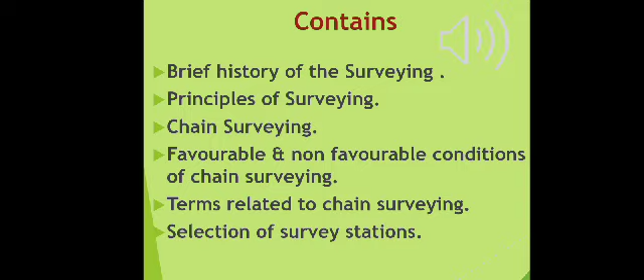Today, I will discuss the brief history of surveying, principles of surveying, chain surveying, favorable and non-favorable conditions of surveying, different terms used in chain surveying, and also selection of survey stations.

In this slide, I will discuss the brief history of surveying. Surveying was first started in Egypt about 1400 BC, when land divisions were washed away by annual floods of the Nile. This was for taxation purposes. Rope stretchers, the Egyptian surveyors, made this survey with simple instruments like rope having knots at unit distances.

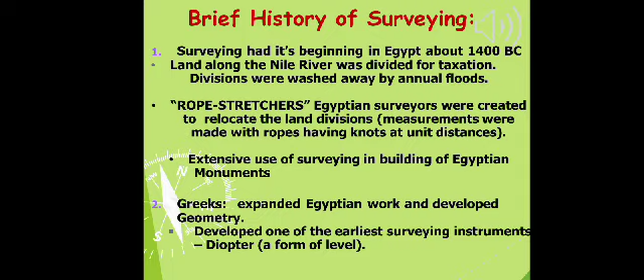The Greeks expanded the Egyptian work and developed geometry and the diopter, an early instrument for surveying. The Romans used surveying in more scientific ways and developed Roman roads, aqueducts, and land division systems. Groma, libella, and chorobates were developed by the Romans.

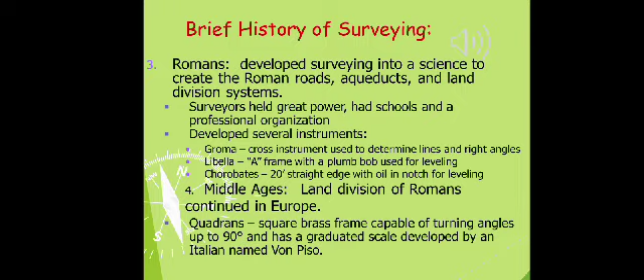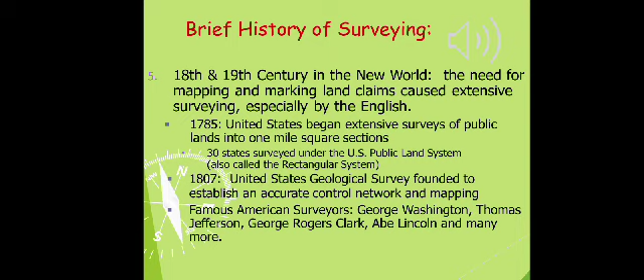In the 18th and 19th centuries, the English needed mapping. In 1785, the United States began an extensive survey of public lands into 1 mile square sections. In 1807, the USA Geological Survey was founded to establish an accurate control network and mapping.

Licensure for surveyors in all states developed in the 20th century and beyond. In the early 1990s, educational requirements for licensure began. A shortage of licensed professionals is projected well into the 21st century.

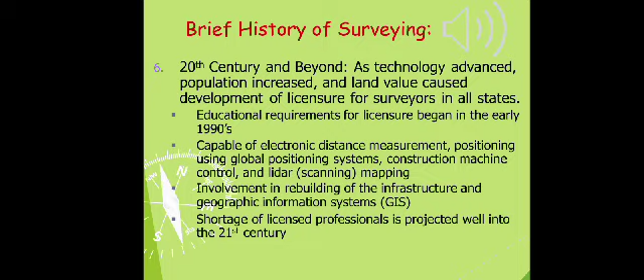In this slide, I will discuss different principles of surveying. The first important principle of surveying is to work from the whole to the part. According to this principle, the whole area is enclosed by main stations and main survey lines. The area is divided into a number of parts by forming triangles and squares. This principle involves fewer errors, and detection of errors is easier in this principle.

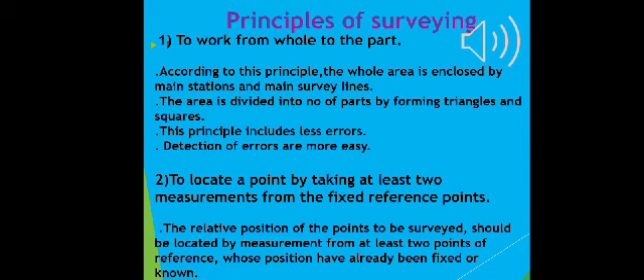The second important principle of surveying is to locate a point by taking at least 2 measurements from fixed reference points. The relative position of the points to be surveyed should be located by measurement from at least 2 points of reference, whose positions have already been fixed or known.

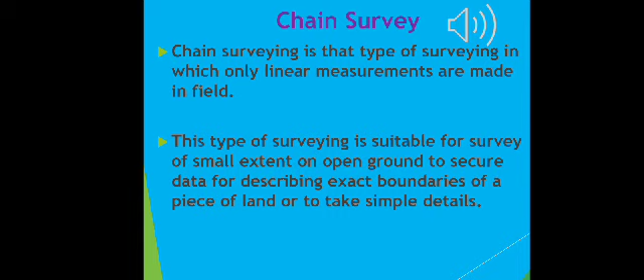Chain surveying is recommended when the ground surface is more or less level, a small area is to be surveyed, a small scale map is to be prepared, and the formation of well conditioned triangles is easy. For large areas, when too many details are required, wooded countries and undulating areas, chain surveying is not favorable.

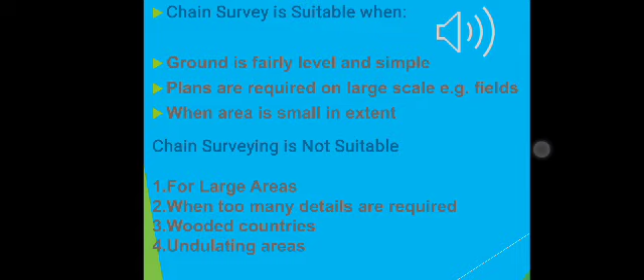Here, I will discuss different steps followed in chain surveying. The first step is reconnaissance. In this step, preliminary inspection is done of the area to be chain surveyed. Then, an index sketch or key plan is prepared. Next, walking over the whole area and thoroughly examining the ground is done, and then the positions of boundaries, roads and rivers are noted down.

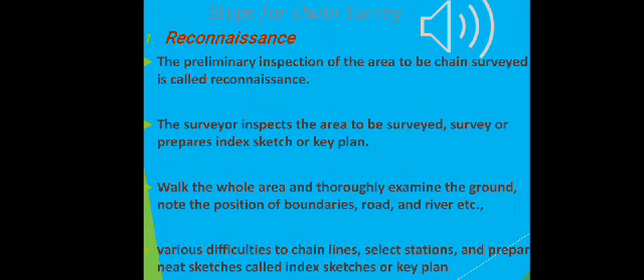Next, stations are marked with ranging rods or wooden pegs. If the surface is hard, then nails or spikes are driven, or a stone with a cross mark is embedded. This step is known as marking stations. Another step is reference sketches. After marking, stations should be referenced, that is, measurements are carried out from 3 permanent points, and the points may be the corner of a building or a tree.

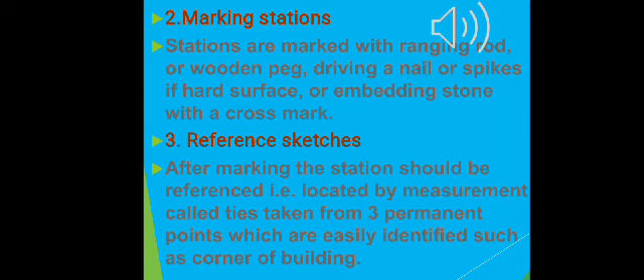The next step is running survey lines. After preliminary work, chaining is started from the baseline and carried throughout the framework continuously. The chain is laid and kept lying. Offsets are taken to locate nearby details. Ranging is done whenever necessary, and all these details are noted down in the field book.